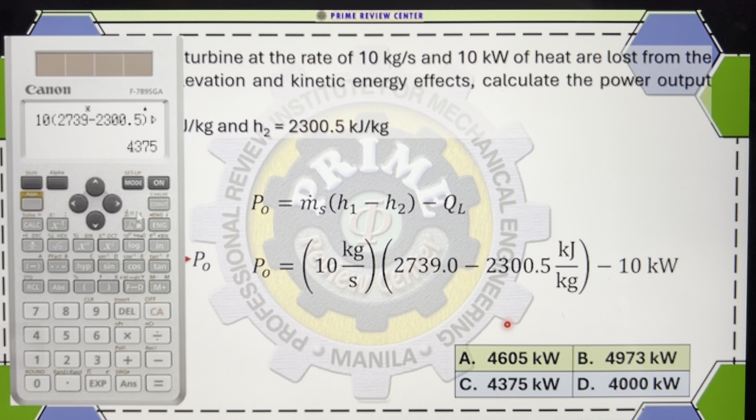So that's 2739. By the way, ang unit na lalabas ay kilojoule per second. And kilojoule per second is kilowatts. So kilowatts na yung makuha natin. Press equals, and makuha natin yung letter C, power output.

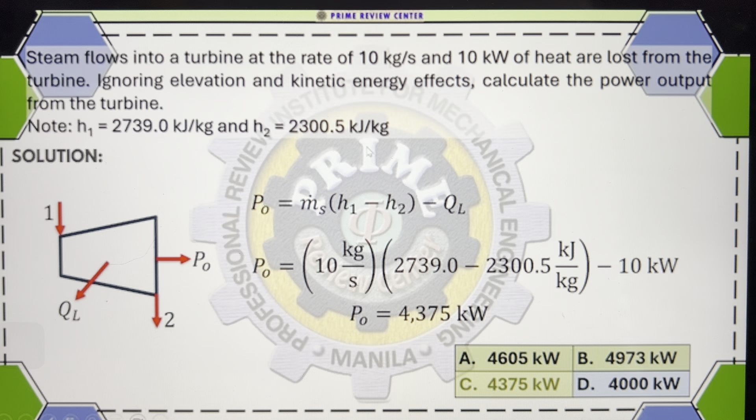Yes, so another problem sa ating power industrial plant. So the enthalpy of air is increased by 139.586 kJ per kilogram in a compressor. The rate of airflow is 16.42 kg per minute. The power input is 48.2 kilowatts. Which of the following values most nearly equals the heat loss from the compressor in kilowatts? So naghahanap ng heat loss sa kilowatts. So to solve this problem, we will illustrate yung compressor natin.

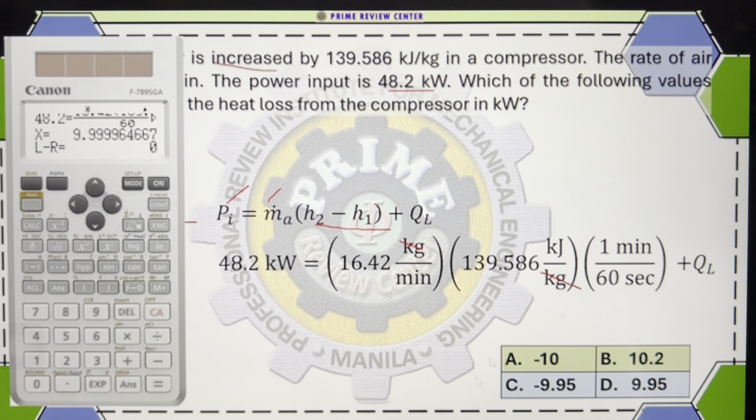So, that's 48.2 equals 16.42 times 139.586 divided by 60. Then, plus natin yung hinahanap na heat loss. Then solve. So, press equals, and makuha natin yung value na 9.999 or basically that's 10 kilowatts.

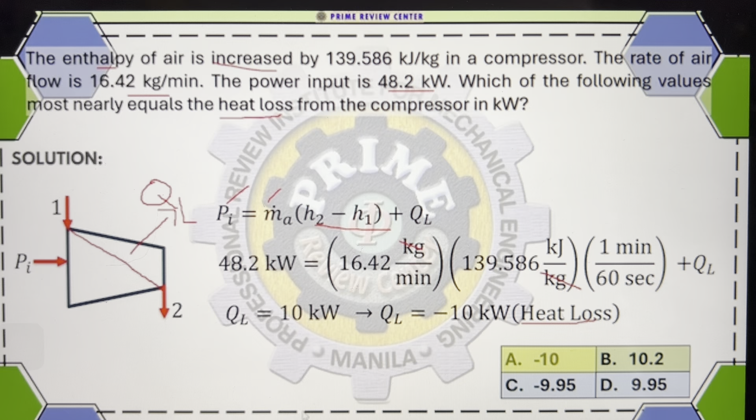And so another problem sa ating power industrial plant engineering. A Carnot engine requires 35 kJ per second from the hot source. The engine produces 15 kilowatts of power. Temperature of the sink is 26 degrees Celsius. What is the temperature of the hot source in degrees Celsius?

So naghanap lang ng temperature ng hot source or T-high. So pag meron tayong Carnot engine, given tayo ng dalawang temperature, yung isa given, yung isa hinahanap, and given tayo ng requires from hot source, so yung energy na galing sa hot source, that is heat supplied or QA. So meron kang QA and engine produces. Pag sinabing engine produces, yun yung work net natin. So kung meron kang work net, meron kang QA, tapos meron kang temperature, yung isa hinahanap yung temperature, then you will use yung equation natin na Carnot cycle efficiency.

Diba? So bakit sir? Kasi sa Carnot cycle efficiency, nandoon yung 1 minus TL over TH. Given ka nung temperature ng sink, yun yung low temperature. Kasi hinahanap yung temperature ng source, yun yung TH. Also, given ka rin ng work net tsaka ng QA. So we know that work net over QA ay efficiency. So yan yun. Bali, kung given yung tatlo, pwede na natin ma-shift solve yung T-high natin.

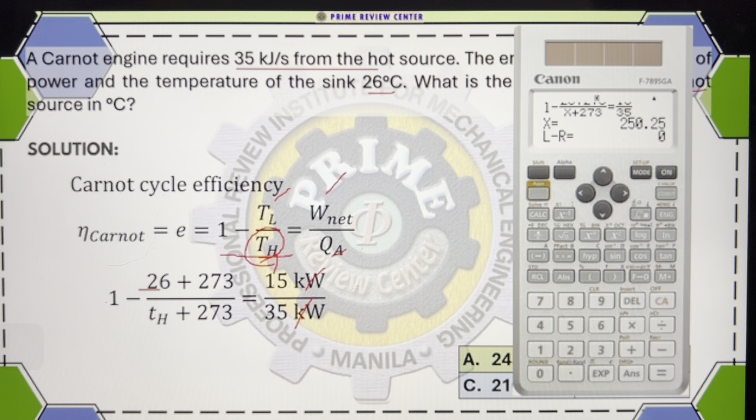So, dito sa problem na to, kailangan nyo i-recall yung mga relation ng efficiency, diba? Since minsan, katulad ng problem na to, pwede nyong mapadali yung solution, diba? Kapag pwede nyong ma-relate yung concept na meron dun sa problem, lalo na kung yung given ay will directly tell you na pwede magamit yung formula. Sige, anyway, nakuha nating temperature high is 250 degrees Celsius. So, from the choices, yun yung letter B.

And sige, so another problem sa our industrial plant natin. The maximum thermal efficiency possible for a power cycle operating between 1,200 and 225 degrees Fahrenheit is. So, maximum thermal efficiency, pag pinakamataas na yung thermal efficiency, ang component mo lang ay yung Carnot cycle efficiency. It's the most efficient heat engine. Pag given kang dalawang temperature, efficiency natin is 1 minus T low over T high. Just take note na yung temperature mo dito naka-absolute. Gagawin mo absolute plus 460 para maging degree Rankine. And wala siyang unit kasi magka-cancel out yung degree Rankine natin.

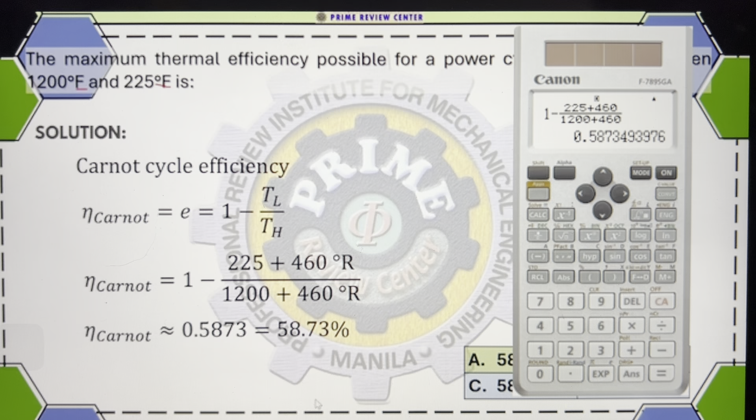So, lagay lang natin yung values. It's 1 minus 225 plus 460 over 1,200 plus 460. So, press mo lang equals. Press FD para sa percent. So, makukuha mo yung 0.5873 or 58.73%. So, from the choices, yung pinakamalapit ay letter C.

Okay, so another problem. So, basahin ko lang. A Carnot engine receives 130 BTU of heat from a hot reservoir at 700 degrees Fahrenheit and rejects 49 BTU of heat. So, calculate the temperature of the cold reservoir. So, naghanap lang ng temperature ng cold reservoir or that's T low. So, to solve this problem, tulad nung ginawa natin previously, we will need to recall yung relationship ng mga formulas ng Carnot cycle. So, kung naghanap ka ng temperature, isa given, tas Carnot naman to, we can use the efficiency.

So, i-apply natin yung efficiency dito. So, efficiency is equivalent sa 1 minus T low over T high. And also, that's also equal to work net over QA. So, sir, bakit i-equate pa natin dito? So, since given ka ng 130 BTU of heat, that is from hot reservoir, that's QA, diba? And also, meron ka ding rejection. Sinabing rejection, that's QR, given din yun.

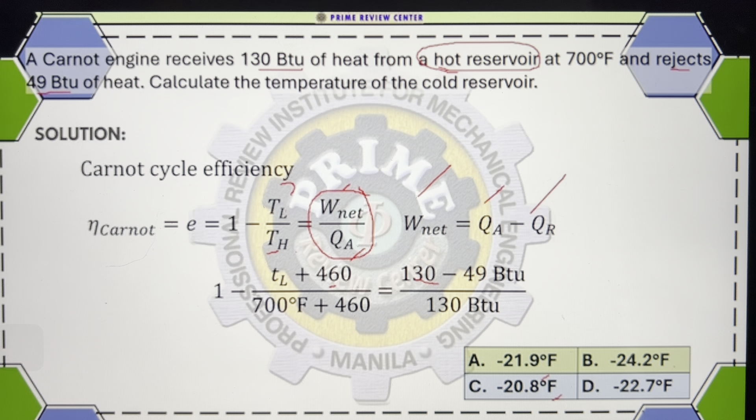So, basically, that is 1 minus T low plus 460. The reason of adding 460 here, para maging degree Fahrenheit na ilalabas dito pag shift solve ka. So, over 700 plus 460 equals work net, that is 130 minus 49, all over QA na 130. Sige, shift solve lang natin yan para makuha yung T low natin. So, walang unit na makikita dito since pare-pareho naman yan. Yung isang temperature naman is Fahrenheit, so we will be expecting a Fahrenheit dun sa temperature natin. Yung BTU will both cancel out since yan ay same units.

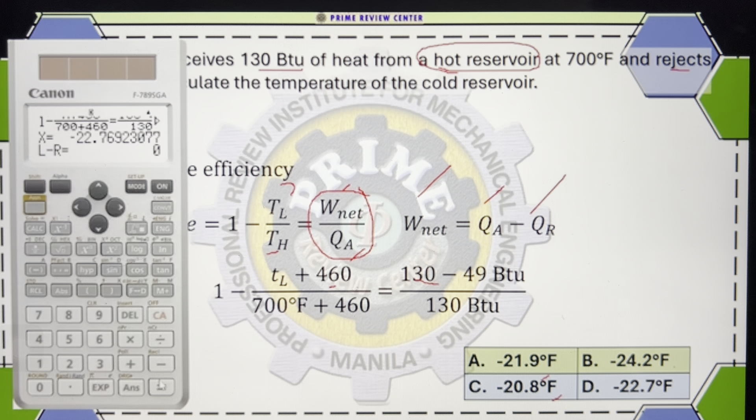Yan. So, actually, pwede nyo rin gamitin as a solution dito sa problem na to yung Carnot principle. Yung QA divided ng QR equal yan sa TH over TL. Pwede rin yun. So anyway, yung na-compute natin ay negative 22.77. So basically, that is yung letter D.